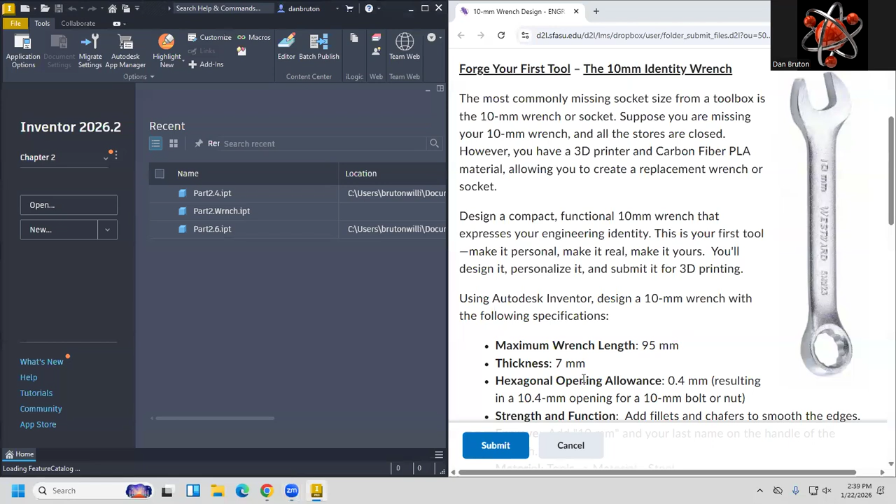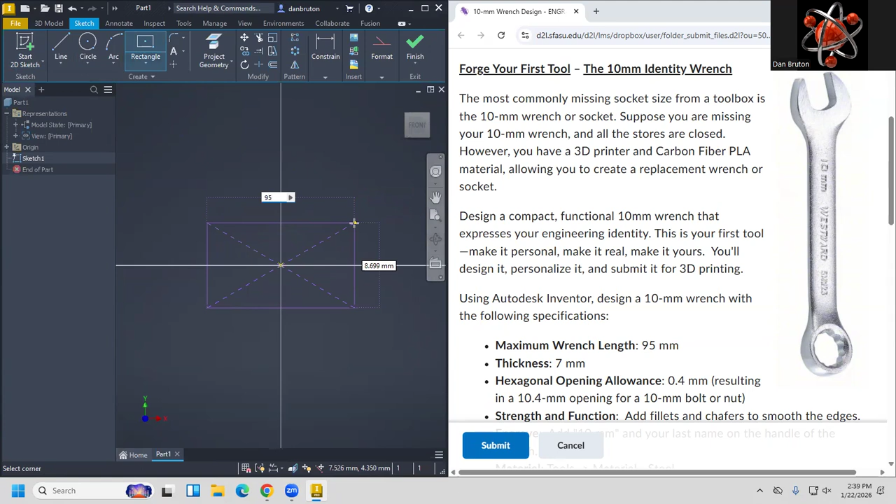The maximum length of this, we'll say from center here to center there, good approximation is 95. So we'll start a new sketch, then select the back plane, and then select rectangle. Usually a center rectangle will do. Then we'll type in 95 for that top dimension, hit the tab key, and then we'll type in 7 for the other one. Hit enter, and you have your basic handle. So that's this dimension here, and that dimension right there.

All right, so then we need to make a hexagonal opening, 10.4 millimeters to fit over a 10 millimeter bolt or nut. So we'll do that out here. So this can be found under the polygon, six-sided, select the middle, go out like this. Then we'll make the constraint of dimensions from top to bottom. We'll make that 10.4. And then we also need to make it so that it doesn't rotate.

You might notice that if I grab this or one of these sides, I can rotate it. I think what I can do is just go to constraint, horizontal, and then lock that down for one of those. Now you see that it's got 6 points in here, so we will make another polygon, hexagon. This time we'll make it so that the point is up in this direction. But everything else can be the same, such as this can be vertically aligned. And then from flat to flat distance, in other words, from there to there, under constraint, select the dimension tool.

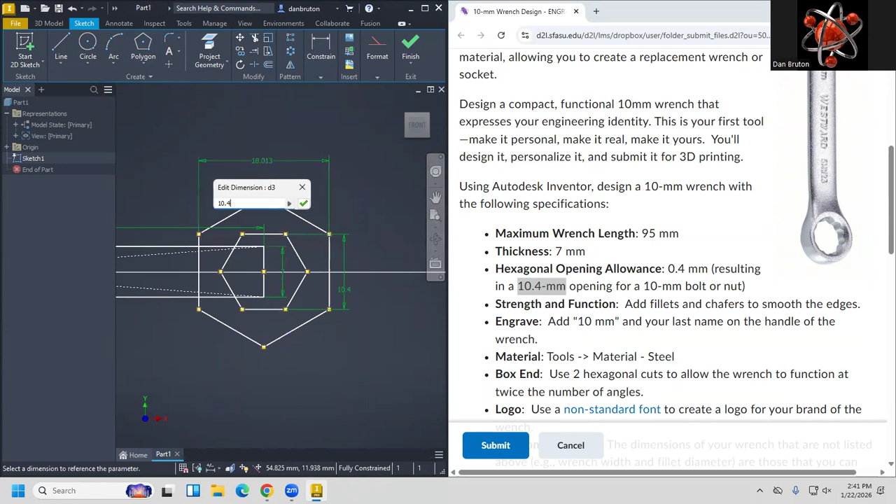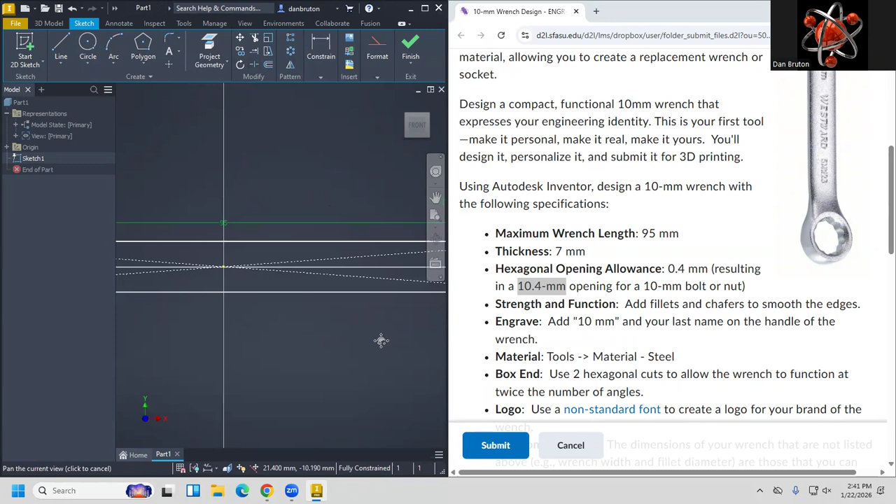10.4. Then we need to have some outer amount there to have around that hole. And so I'll just put a distance in there and approximately make that one, I guess 17 should do it. Let's go over to the other side and do the same thing. Except this time what we're going to do is have an opening right there, and a box end. And you can go ahead and make it as simple or as complicated as you like. You can have it go off at an angle. I'm just going to do something simple by using an offset. So I'm going to put an offset here, make it about 2 millimeters from that point.

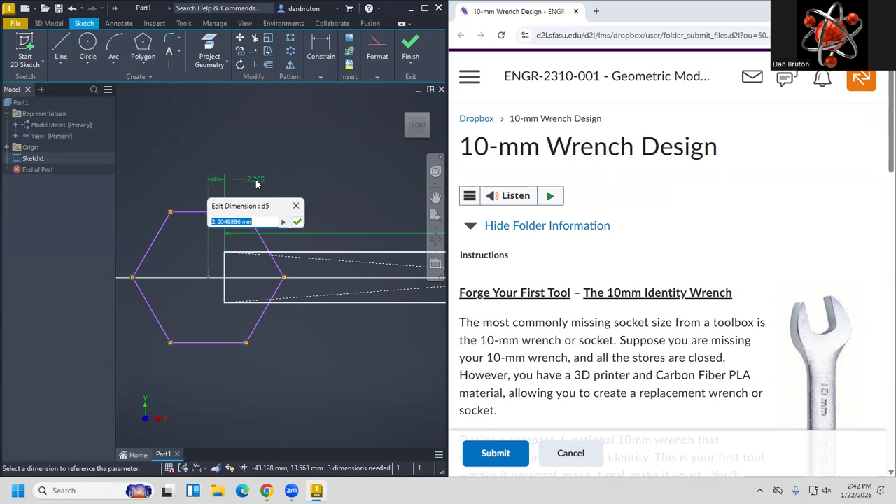Constrain this. And then from flat to flat distance, again, it's going to be the standard 10 millimeters plus a little bit of offset, so it goes over the part. Then we can put a circle around that. Maybe 17 would be good as well. I'm going to type in 17 this time. And then we need to be able to cut all the way out here. So we're going to draw 2 lines from here to there, and from here to there.

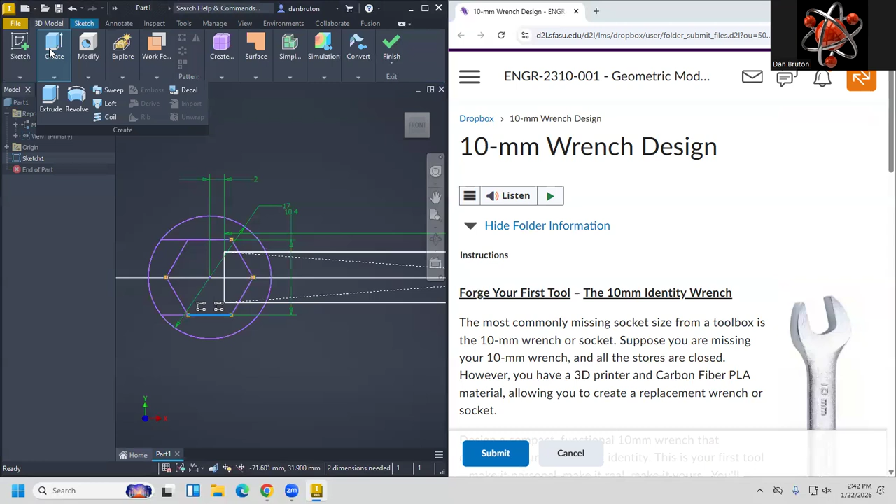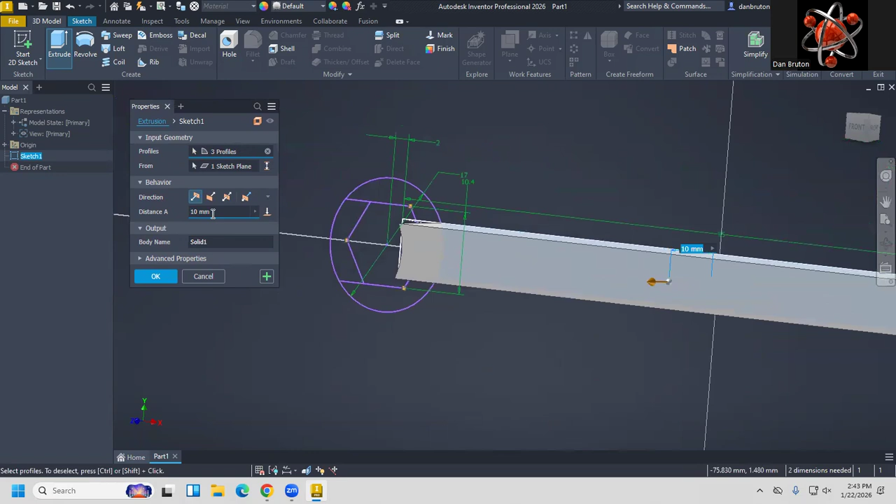Okay, so now we're going to extrude. Go to 3D model, create, and we will just extrude the parts that we need. That will be the handle and part of the rest of this. Now we don't want to go all the way in there, so I did that wrong. So let's take that profile out. How about just right there, around the outside, and right in here. Now we don't need it to be that thick. Maybe 7 millimeters ought to do it.

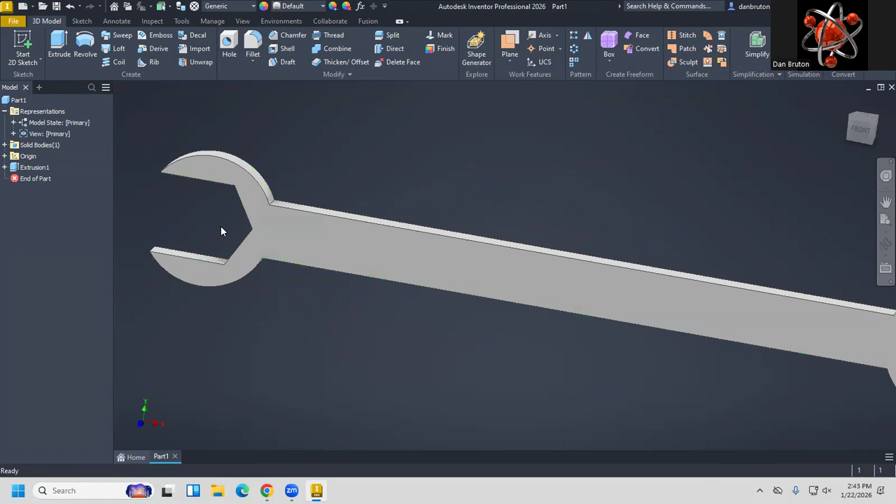We're using the shift and scroll wheel to orbit around. We want that one, and that one, and that one. That should be good enough for what we're looking at. Now you probably need to adjust this a little bit because there's not enough material here to support that. So make this circle bigger or move this hexagon further out that way before you turn it in. Also, I want you to add a fillet to these edges to make it a little bit easier to hold, and you can make them maybe 1.20.

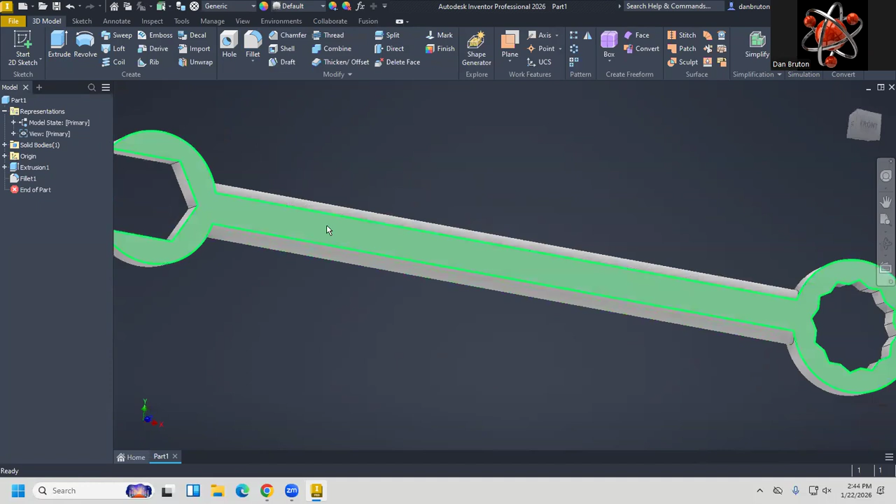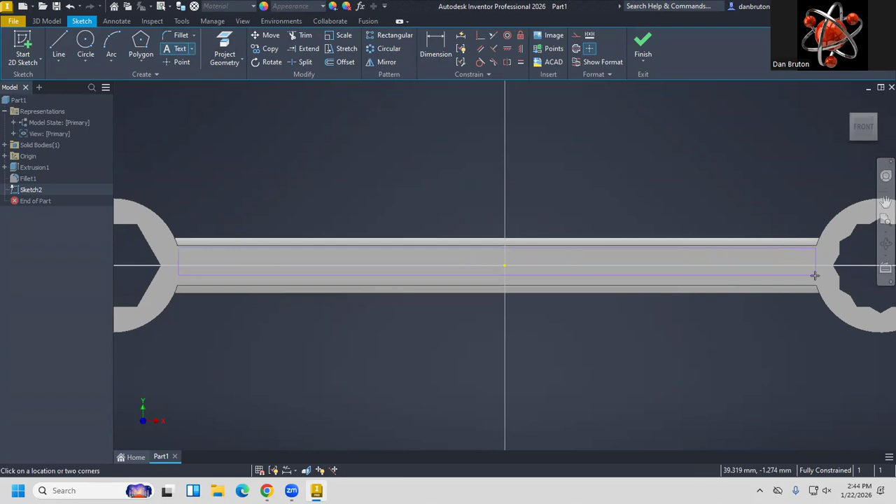That's really good. And then, well, you know what? That's probably not enough room to put your initials on there. So you can right click and edit that feature, and just type in 1. Give yourself a little bit more room. Going back over to the sketch, you can right click on the surface and say new sketch. Put some letters on there. You know what? Let's make it go all the way from left to right. So let me cancel that, do that again. Let's go all the way from here over to there and center whatever we get.

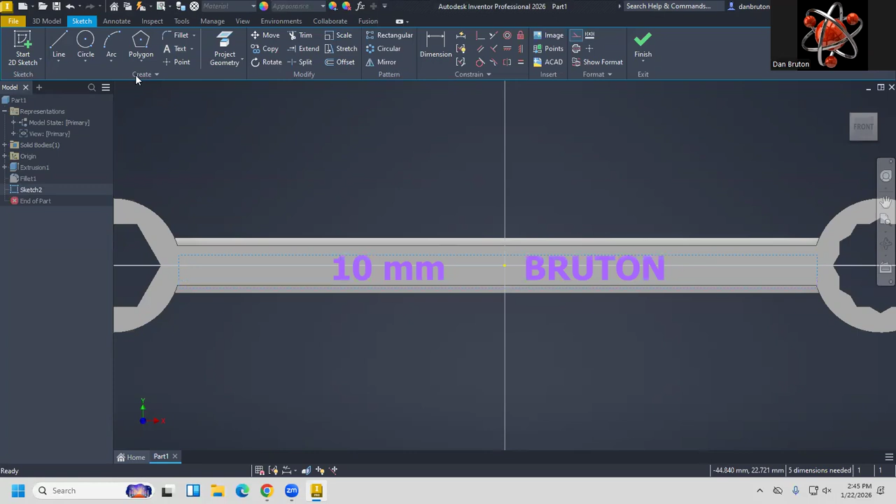So we're going to put this, the size is 10 millimeters. And we're going to put our last name after it. Now let's Control A to make it bold and centered. And then we should be able to shift it down just a little bit after the fact. So grab it and kind of pull it down like this. And finally do an extrude cut. Highlight it in green, 0.5 millimeter down. And by down, I mean cut like that right there. All right, and that was your wrench. Just make it a little bit more structurally sound out there.

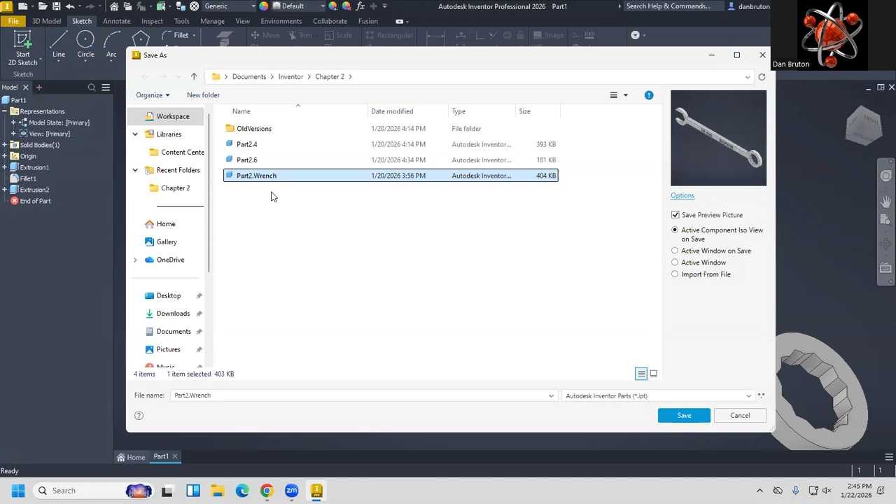All right, let's save this so we can upload it to D2L. Save it as part 2 wrench. I'm just going to put version 2 since this is my second one. All right, that's what you upload to D2L to get credit for this very simple, straightforward getting started exercise.